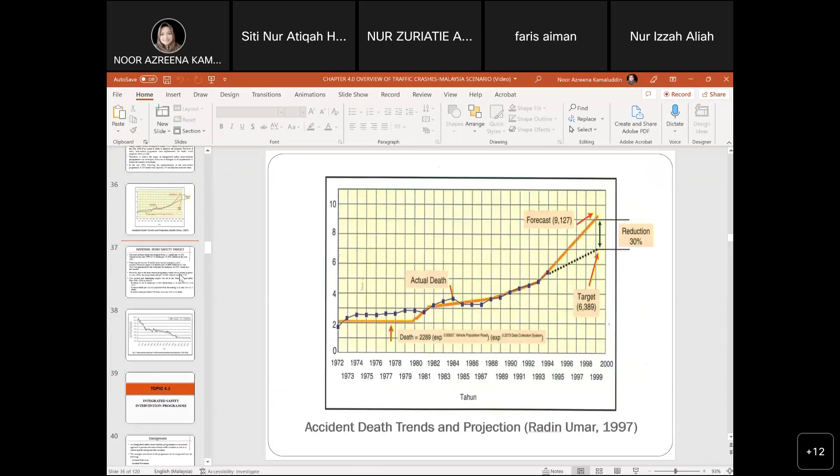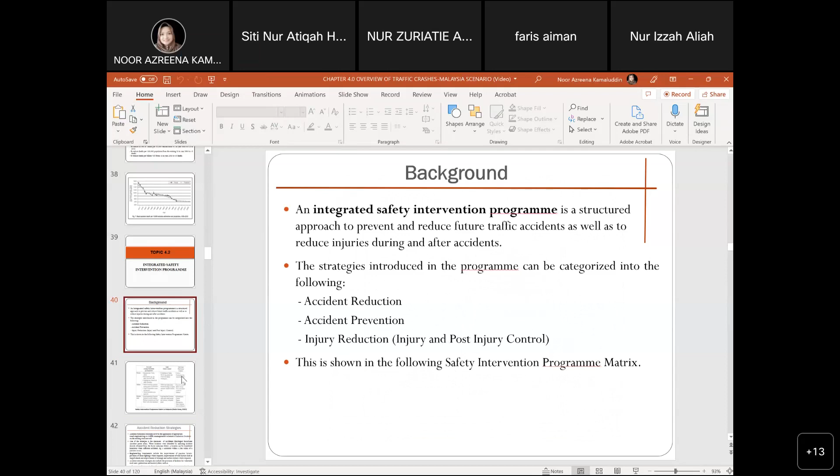Why accident happen? Because one of the drivers fail to cope the surrounding, the driving environment. So for the integrated safety intervention program, there are three elements. The first one, they try to reduce the accident, but if the accident still happen, then they also come up with the prevention. Tapi kalau berlaku juga, kemalangan tetap berlaku, then they try to reduce the injury severity by improving the injury and post-injury control. So kalau tengok kat sini, accident reduction and prevention is in the pre-crash category.

For example, we can give awareness via education, enforcement, campaign, vehicle inspection, etc. Road engineering program as well. Then once the accident occurred, then how we control? Injury control and also post-injury control, post-crash.

Maksudnya semasa kemalangan berlaku dan kita ada injury control, contoh kita pakai helmet so that it can reduce the injury severity of the head of the rider.

Then post-injury control, macam orang yang ada dekat situ ataupun first aid, yang rescuer kan, ambulance. And nowadays ambulance is fully equipped with all the advanced technology. So dalam ambulance pun dia dah boleh at least help the victims kan, before arrive at the emergency department of the hospital. Okay, so dah banyak lah improvement dari segi post injury control.

Okay, during injury ni, ini termasuk lah airbag lah, apa lagi, brake kan, dan semula crash absorption, crash cushion, semua tu during the injury control. Try to reduce the injury severity.

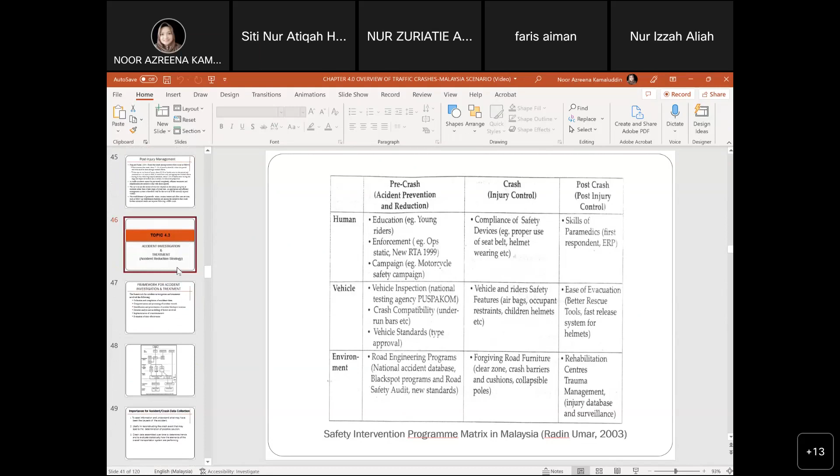Hari ni probably till the end of the class we will try to finish chapter 4. Topic 4.3 is about accident investigation and treatment. So once the accident occurred, how we do a forensic, how we investigate, what are the factors that cause the accidents, and how to treat or mitigate, how to fix the problem.

Let's say the accident occurred due to, contohnya, katalah unsignalized intersection. Selalu berlaku kemalangan 90 degrees perpendicular, selalu berlaku. So maksudnya ada kemungkinan dua-dua drivers tak considerate between each other, so berlaku kemalangan. Maybe how to fix, probably we can put warning sign, that is the cheapest, ataupun convert the unsignalized intersection to signalized intersection, ataupun kalau ada elemen-elemen yang lain, then we have to do the investigation.

Okay, let us look into the framework for accident investigation and treatment.

Madam, sorry to interrupt. May I ask? Yeah, sure. Are you recording the lecture today? Yeah, I'm recording. Okay, luckily you asked. Saya pun terlupa, sebab saya tekan tadi. Okay, we record. Okay, sorry, kita continue, kejap.

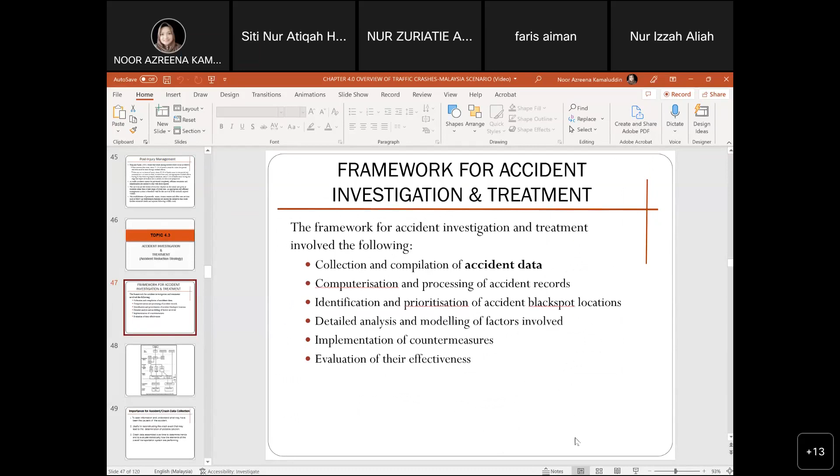Saya tak boleh baca yang atas ni. Apa tajuk dia? Okay, framework for accident investigation and treatment.

So it involves several processes, because we want to do an investigation, so there are steps involved. First and foremost, we have to get the data. Okay, the first step: collect and compile the accident data. Where to get the data?

The one and only agency that collects all the first-hand data is actually Royal Malaysia Police, PDRM. So accident data, whenever any accident occurs, they will report to the PDRM. Then PDRM will distribute the data to JKR, the local authorities, for improvement of the road, for example.

Because PDRM, the police, they only focus on enforcement. Meaning, if they get information that a road has many accidents due to violation of road rules, they will go to the site and probably do a roadblock. So police only focus on enforcement, but to improve road conditions, to identify the cause, to fix the problem, all that is the work of the local authority, JKR and also MIROS, they will propose solutions.

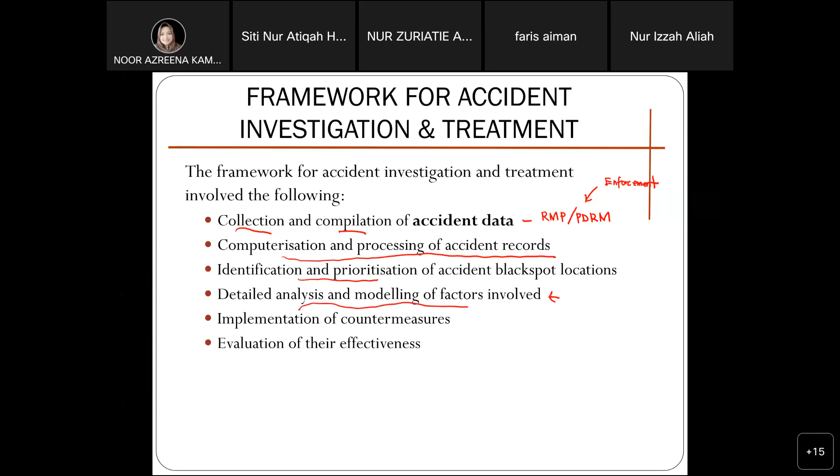So they will ask the local authority or JKR to go to the site and do inspection, and probably they will come up with a solution. Then detailed analysis and modelling of the factors involved. This part PDRM doesn't do; this is the work of the local authority or any safety actor. Then implementation of the countermeasure, and lastly, evaluation of their effectiveness.

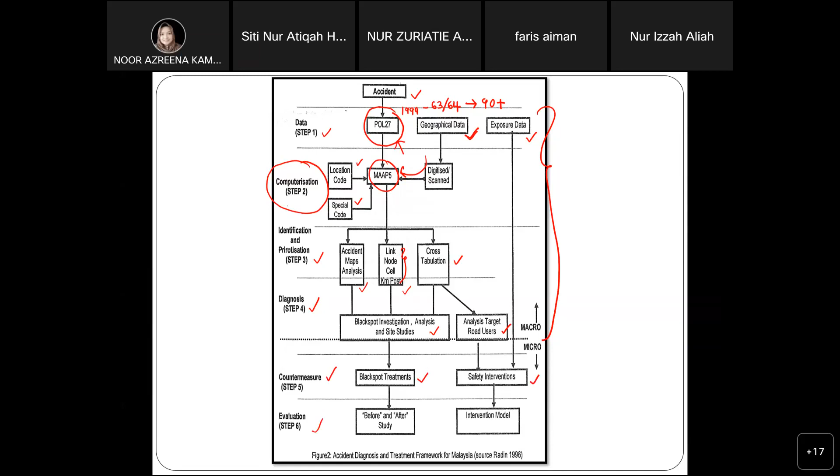And lastly is evaluation. How about the number of accidents after the implementation of the countermeasure? Before and after study, and maybe they will produce the intervention model as well.

Basically this is the procedure when an accident occurs. All accidents occurring should be reported to the police within 24 hours.

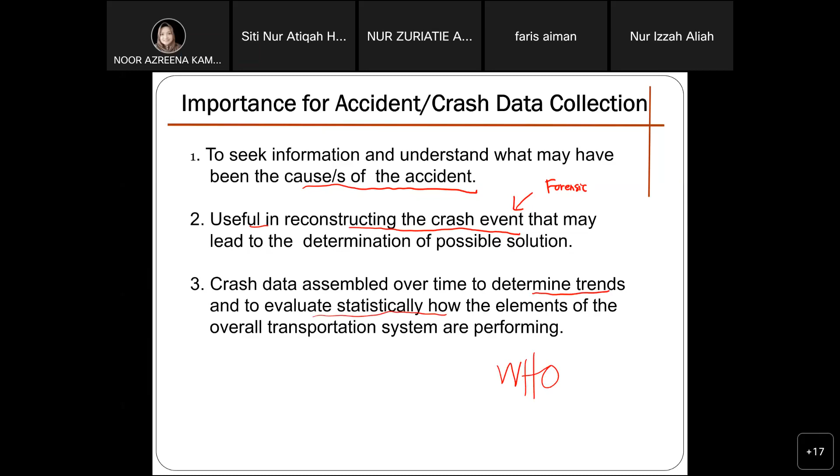Then to determine the trend, dan juga evaluate statistical bagaimana elemen keseluruhan transportation performing. So that is why the crash or accident data is very important. Even WHO pun mengumpulkan data kemalangan di setiap negara, World Health Organization.

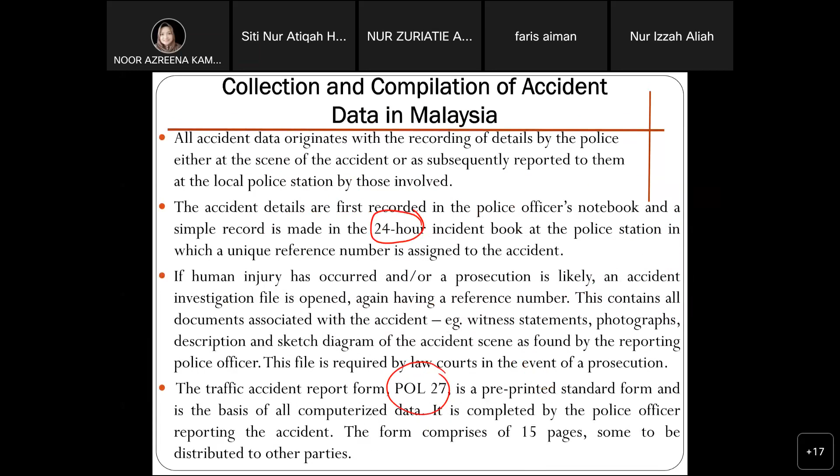This is how the flow of the report or flow of information once the accident occur. Dia lebih fokus sikit. Contoh kalau kemalangan berlaku, apa berlaku, polis akan datang. Siapa polis ni? Dia ada investigation officer, IO. Kita panggil IO, investigation officer. So this investigation officer will make a police report for you.

Dia yang akan menulis, dia yang akan type, tapi awak memberi maklumat. Witness will give information. Tapi as my experience, witness punya laporan tak direkodkan, witness sekadar membantu je lah. Tapi the main report is victims, yang melanggar dan dilanggar.

Katalah kemalangan berlaku dekat depan Jakel Shah Alam. IO akan datang, IO will investigate the crash. Lepas tu IO akan report dekat balai dia, katalah balai section 7, dia report kat balai section 7, dia akan isi borang POL 27, and the report must be made within 24 hours.

Once that officer, IO dah isi report, then the report will go to the police district office. Dia dekat section 7, nanti dia pergi ke Shah Alam, kalau Shah Alam ni semua dah under Shah Alam. From Shah Alam, dia akan check dulu POL 27 form semua. Then dia akan directly masuk ke Bukit Aman HQ. Di Bukit Aman sekarang, dulu dia pakai sistem call CARS.

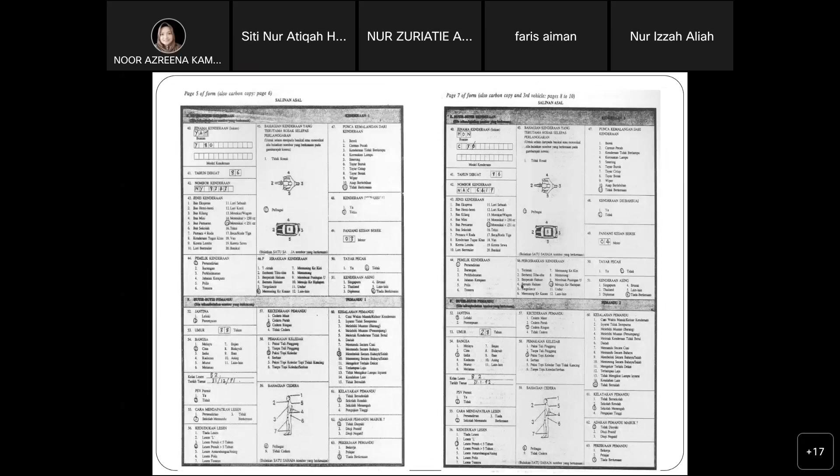Okay, kejap. Okay, tak apalah. Saya nak cari pun waktu ni susah juga.

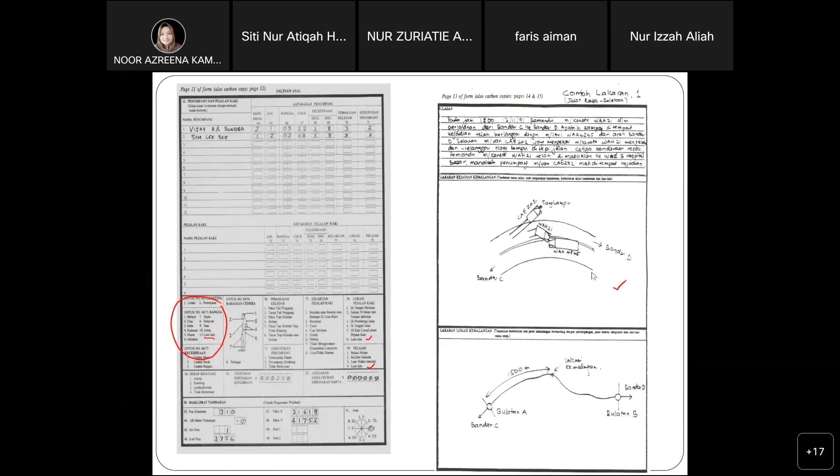Okay, this is just example collected data.

Location, severity, path trajectory - this is all data that is collected.

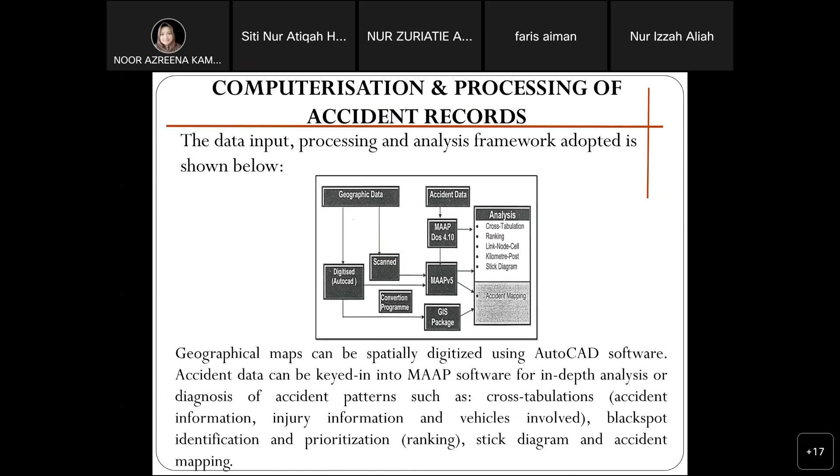This is the third step on the identification and prioritization of accident black spot location.

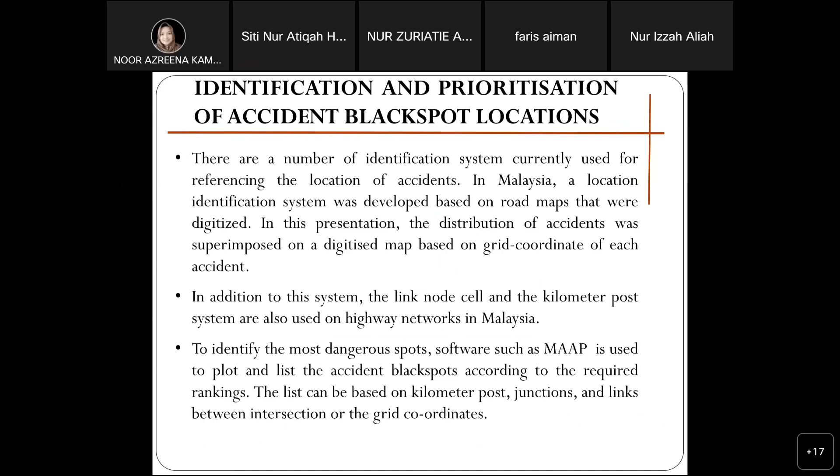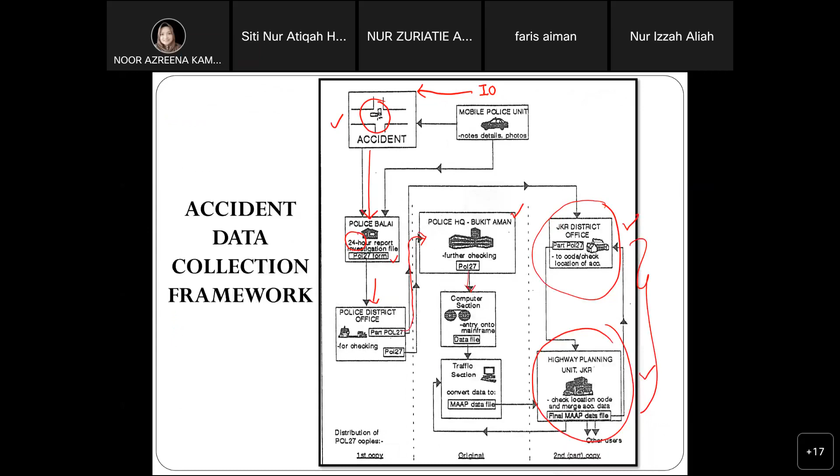This one, step 3, identification and prioritization.

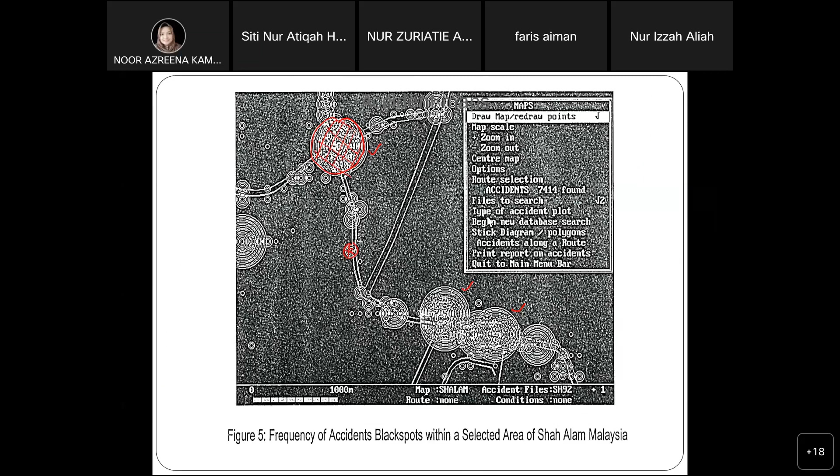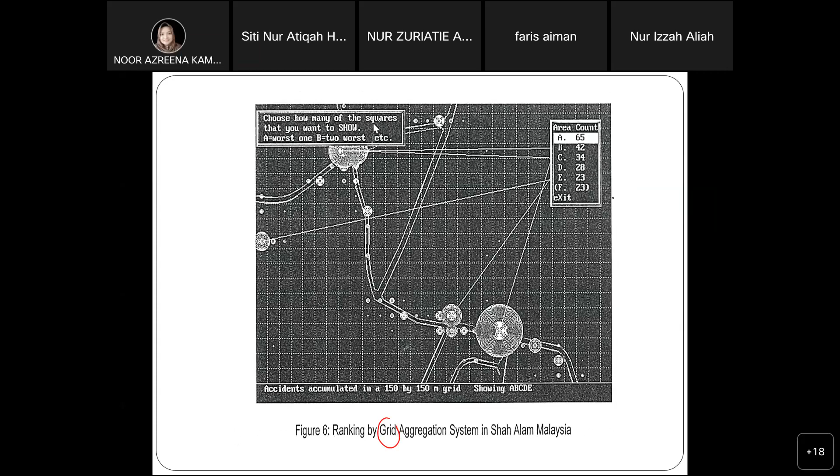This is one of the examples for using coordinates, X and Y coordinate.

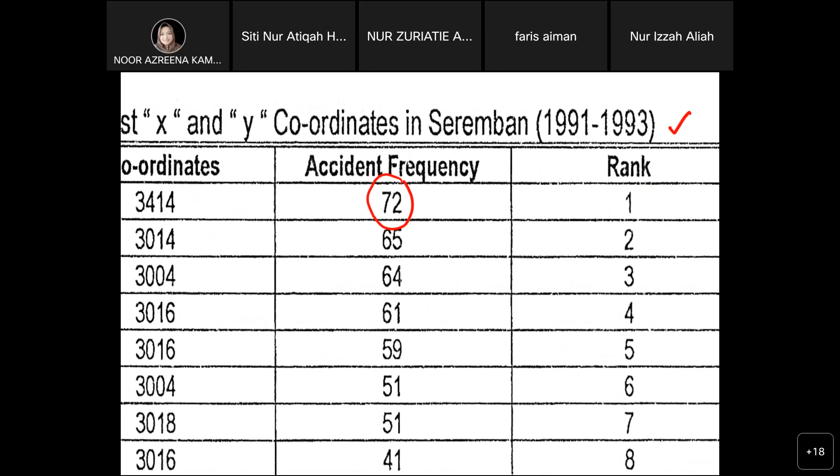This one, if they use the link node cell.

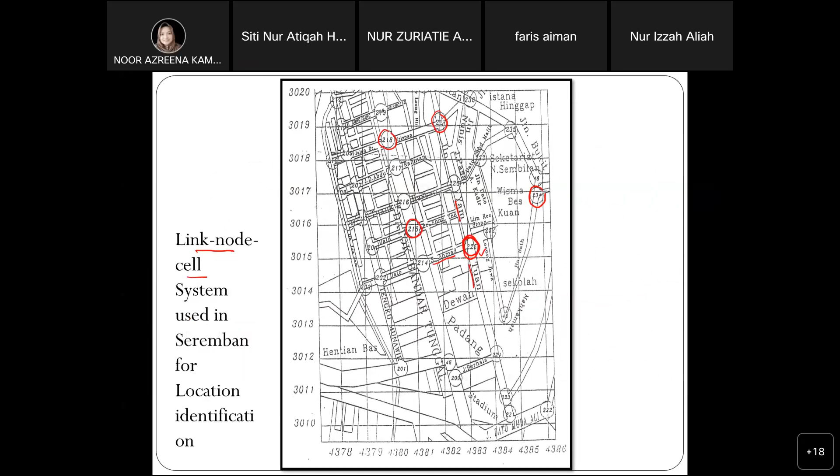Okay, tak nampak, tak ada. Kita tengok 215. Sebab map ni contoh je. Ini jalan Fong Yi ke apa ni? Datuk Fong Yi dengan ni jalan apa, kalau kat sini dia kata Lee Fong Yee dengan Datuk Bandar Tunggal. Jalan Datuk Bandar Tunggal dengan Lee Fong Yee, they rank number 4 with 55 accident number. So this is how they rank the location based on the accident number to prioritize which one needs to improve segera.

Okay, ini contoh yang menggunakan link. This is example using cell. Sama je, maksudnya dia akan rank juga. Kalau pakai cell pun dia akan rank, kalau pakai link pun dia akan rank. Okay, dan yang ni kalau pakai ranking point.

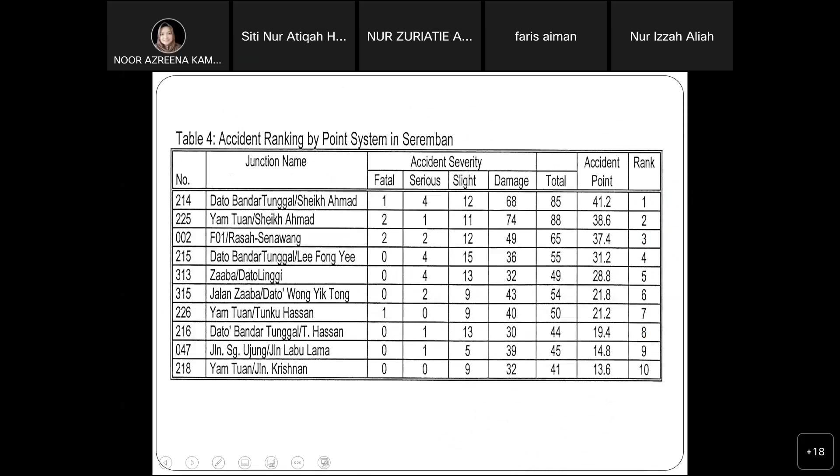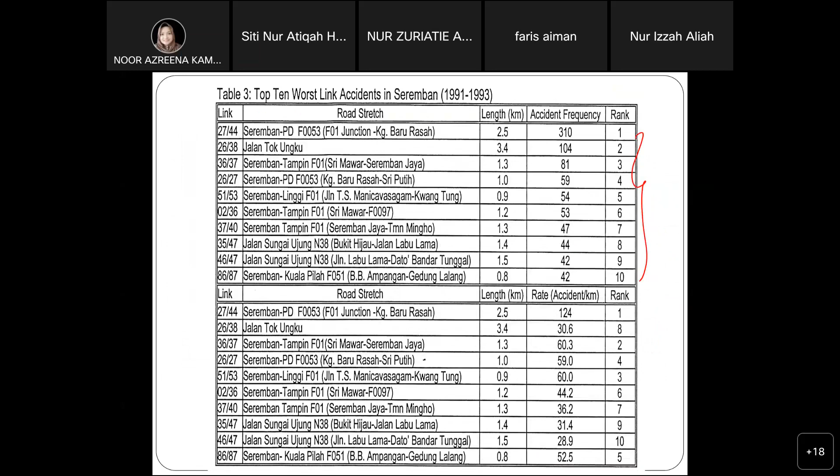Macam mana ada ranking pula ni kan? Macam mana ada cell lah, ada link lah. Yang ni semua ni adalah di sini. Ranking of black spot could either be carried out using map, node, link, cell, accident point, accident costs, kilometer post analysis. So this is how we analyze and prioritize the black spot area.

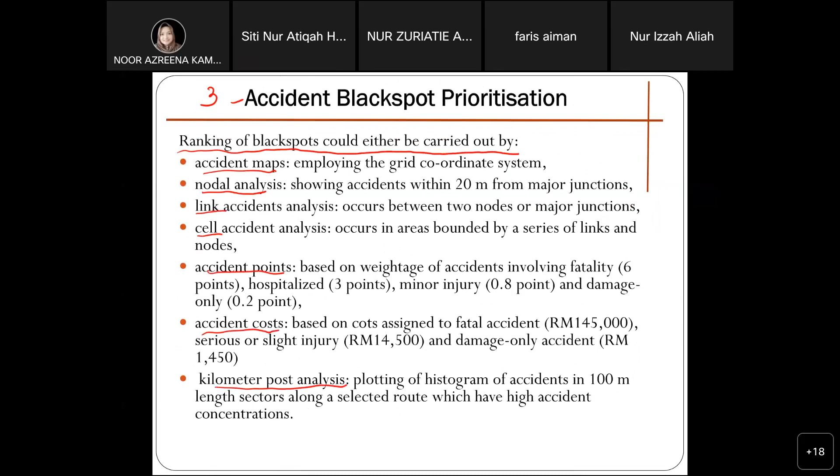Okay, ini accident map, this is grid, this is coordinate, this is node, this is node, link, cell. Yang ni ranking, accident ranking. So how to do the accident ranking?

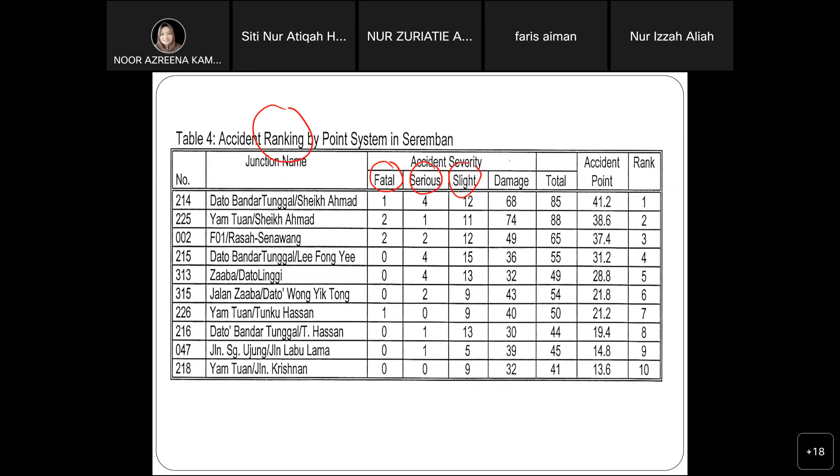They give point for each types of severity. Contoh, kalau fatal, dia akan bagi point. Serious, dia akan bagi point. Slight and damage, total contoh ni 85. Accident point, setiap jenis kecederaan ada point yang berbeza. Point dia mana, kejap.

Kalau fatal, dia akan bagi 6 point. Kalau hospitalized, 3 point, yang ni selalu severe injury lah. Minor injury, 0.8 point, dan damage only 0.2 point.

So kalau nak buat calculation, nanti contoh jalan yang tuan ni, 225 ni, 2 darab 6, 1 darab berapa entah, siapa tak ingat tadi. So ni semua kena darab. Dia come out dengan accident point dan dia akan rankkan. So that is how we use to prioritize the location.

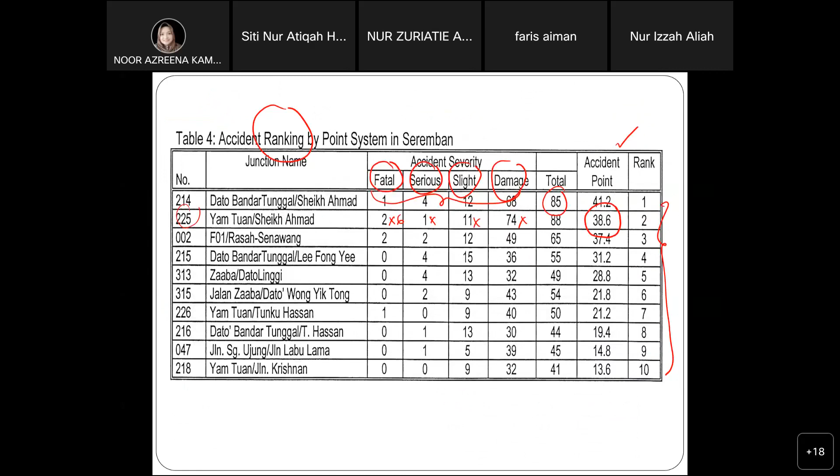Okay, yang ni based on cost. Ni cost pula, tadi ni pakai point untuk accident severity, pakai cost. Konsep yang sama, but the difference is setiap kecederaan ni kita darabkan dengan jumlah cost dia. Saya tengok patah balik belakang, dia ada tak tulis setiap cost kemalangan.

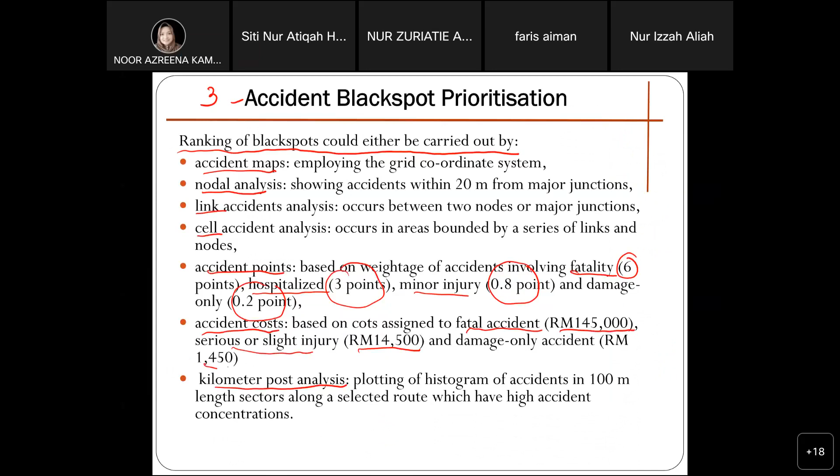Okay, dia kata kalau fatal kena multiply by 145,000. Serious or slight injury multiply by 14,500. Kalau accident damage only 1,450. So that is how they categorize, dia darabkan dengan that value. So they come out dengan cost, then they can rank. So that is how we prioritize ya.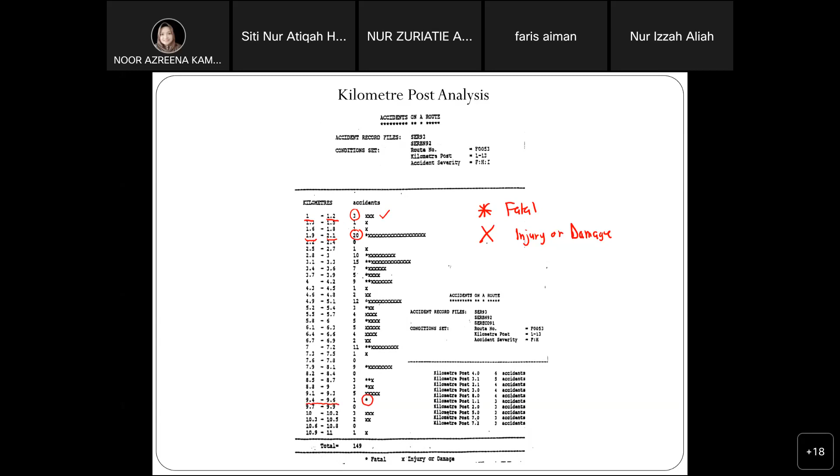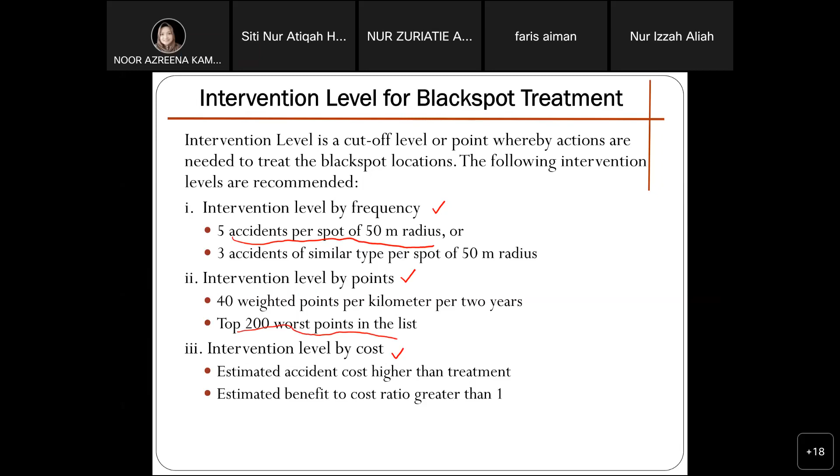Okay, intervention for black spot treatment. Dia ada depends, either intervention by frequency, nak tahu berapa jumlah kemalangan. Intervention by point, kita kira point dia. Intervention by cost, okay. Yang ni boleh baca lah. Contoh intervention by frequency, 5 accident per spot of 50 meter radius. Intervention by point, top 200 worst point in the list. So yang point paling tinggi kita akan prioritize.

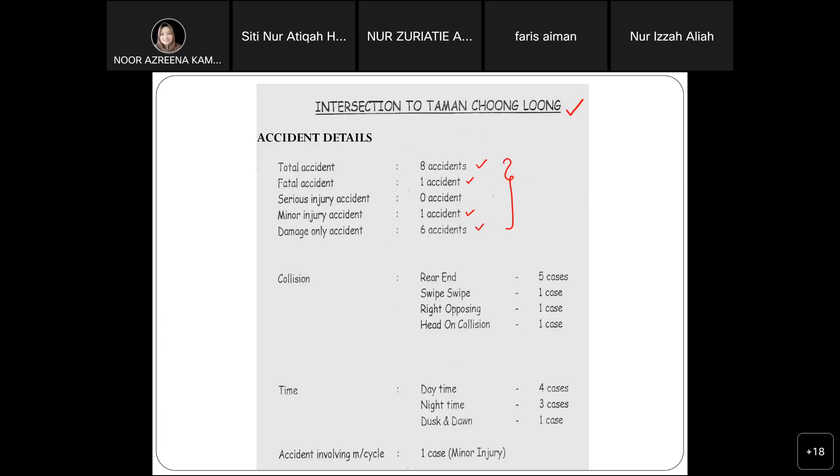Okay, yang ni kita tengok detail diagnosis and implementation of countermeasure pula. Ini satu contoh at Taman Choong Loong. It has been reported, ini report lama, it has been reported at intersection to Taman Choong Loong ni, dia ada banyak kemalangan. Kemalangan apa? 8 total accident, which one of it is fatal, one is minor, and 6 damage only. Okay, ada 8 kan? 8. So out of these 8, 5 adalah due to the rear end, langgar belakang.

So kalau langgar belakang ni normally kalau saya tanya awak, kalau langgar belakang ni selalu berlaku dekat mana? Langgar belakang selalunya berlaku kat mana? Anyone? Traffic light. Okay, selalunya kalau langgar belakang ni berlaku dekat traffic light. Ini early investigation, sebab apa? Sebab orang depan dah berhenti, lampu kuning, orang depan berhenti, orang belakang tengah nak memecut.

So normally berlaku kat traffic light. Tapi kita tak tahu lagi intersection ni macam mana. Swipe ada satu, right opposing satu, head on collision satu. Okay, out of the 8 ni, 4 waktu siang, 3 waktu malam, 1 waktu senja lah. Okay, accident involving motorcycle, motorcycle ada 1 je. So out of the 8 ni, only 1 je melibatkan motosikal. The rest probably passenger car. Okay, ini early info.

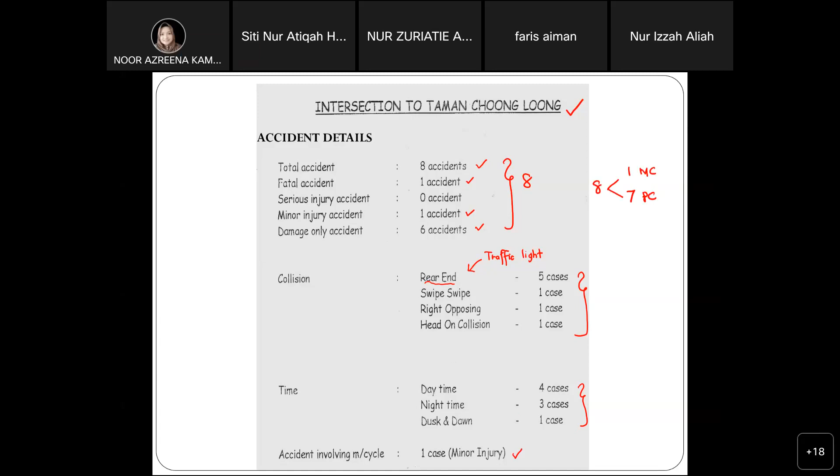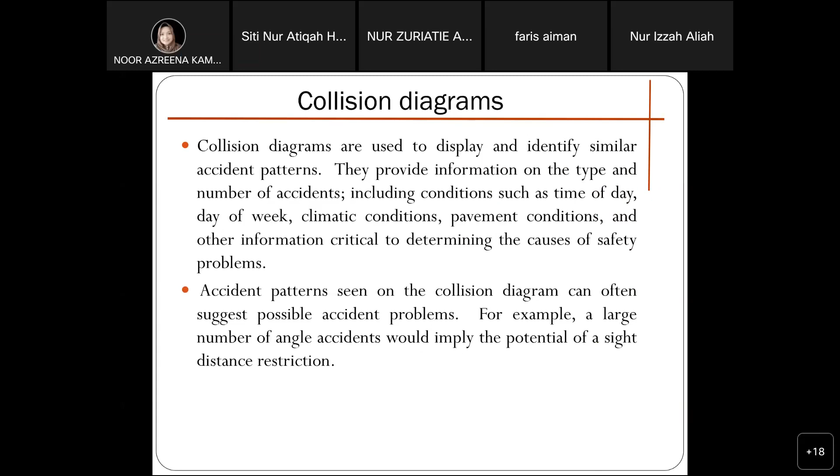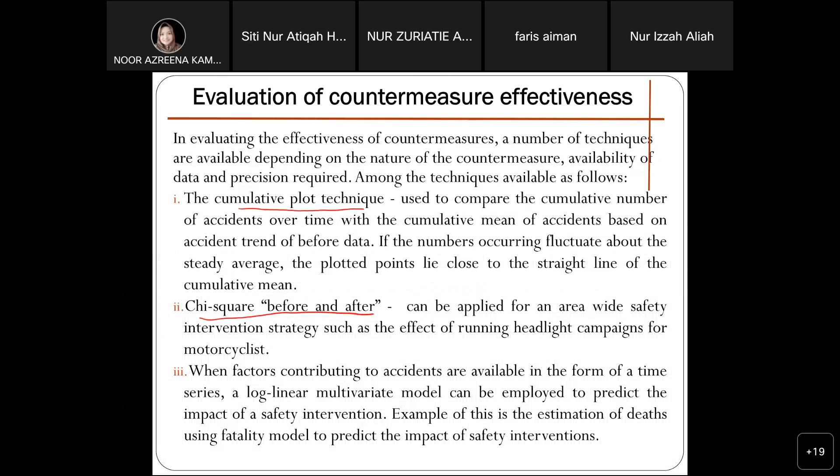Sampai situ. Ada nak tanya? Ada nak tanya tak? So far okay? Okay, madam. So far okay, madam.

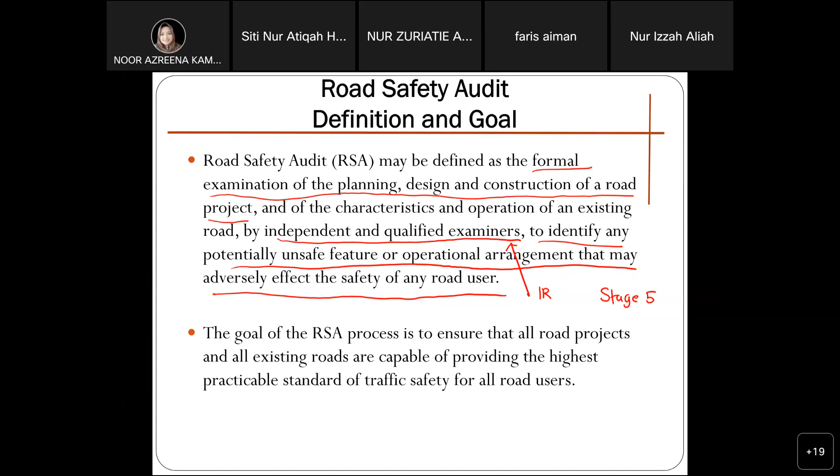So we try to identify any unsafe features on the road. Then we want to come up with the solution, sebab kita tak nak contoh ada hazard yang kita tak fix menyebabkan kemalangan.

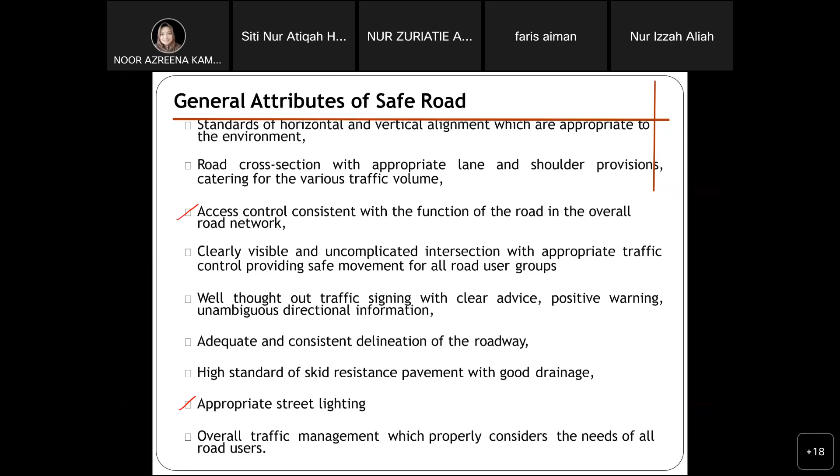Okay, this is example of the safe road attributes. Contoh, ada appropriate street lighting. Apa lagi? Access control consistent with the function of the road in the overall road network. Access control, katalah expressway, takkanlah banyak sangat access control, kan? Buat expressway tapi banyak entrance dia. So dia kena appropriate dengan consistent with the function. Okay, apa lagi? As listed lah banyak ni, general attribute of road safe.

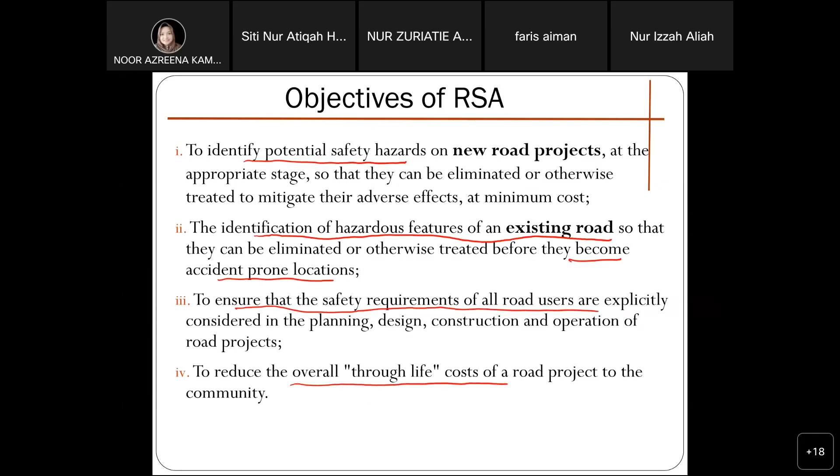So the objective of the road safety audit, there are 4. First, to identify potential safety hazard. Second, the identification of hazardous features of an existing road, because we want to remove it, we want to treat it before it becomes accident prone location. Ensure safety requirement of all road users are explicitly considered in the planning, design, construction and operation. And lastly, reduce overall through life cost of the road project to the community, sebab rakyat yang akan pakai, community yang akan pakai jalan tu.

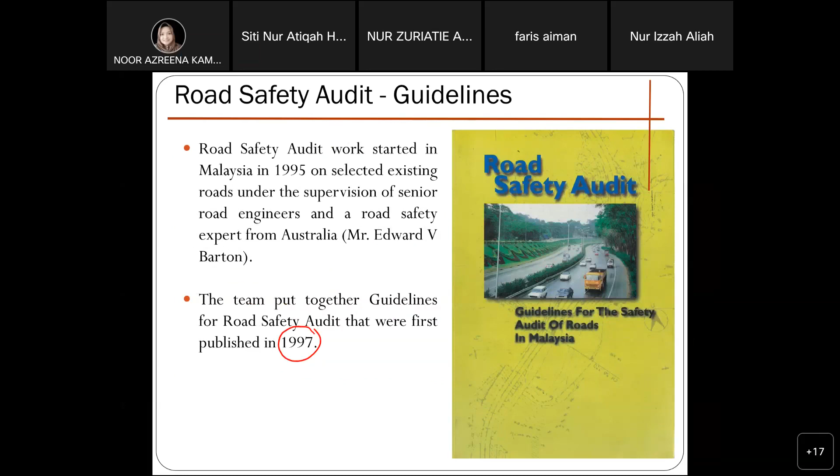Okay, I am currently active with this audit, road safety audit. Saya tengah buat road safety audit dekat UiTM Puncak Alam. Kenapa buat kat situ? Sebab saya tak ada professional engineer lagi, tapi sebab untuk kegunaan dalaman, maksudnya untuk kegunaan UiTM, so masih okay lagi kalau kita tak ada professional engineer untuk do the investigation.

Okay, so saya dan my team dari Mitrans, kita pergi ke UiTM Puncak Alam and do the investigation on the road safety kat sana. Sebab apa? Sebab ada beberapa kemalangan dan antaranya adalah kemalangan maut. Kemalangan maut ada berapa kes saya tak ingat. At least satu daripadanya adalah melibatkan e-hailing rider, penghantar makanan.

Okay, so kita tengok dia punya layout, jalan, siapa yang biasa ke UiTM Puncak Alam, jalan dia agak narrow dan a bit challenging for us sebenarnya bila kita dapat report kemalangan berlaku pada waktu senja. Bila kemalangan berlaku pada waktu senja ni, dia ada melibatkan mystic things lah. So yang tu a bit challenging for us nak describe, sebab bila benda-benda mistik ni bukan fakta yang boleh dibawa ke mahkamah, macam tu contoh.

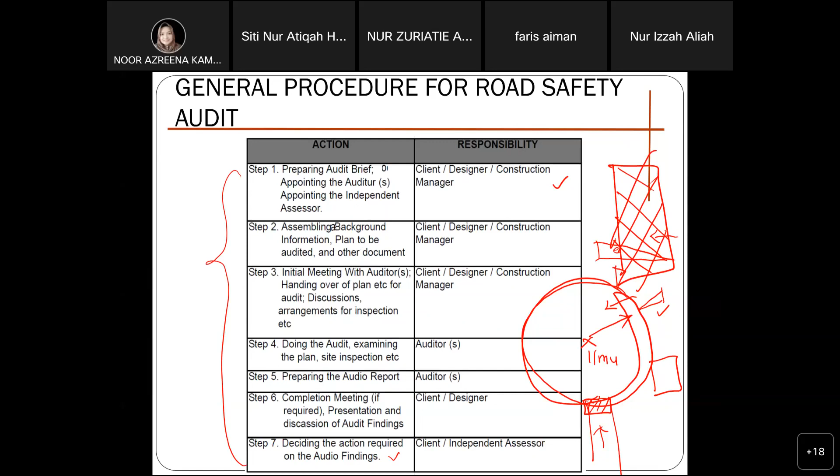Sekarang saya dekat stage untuk siapkan report lah untuk that road safety audit. Okay, so the process dia semua ni until decide the action required on the audit finding. Okay, ni semua boleh baca lah ni, apa kena buat. Okay kalau kita teruskan, ini yang saya cakap pasal stage of the road safety audit, it has 5 stages, which the first stage is on the feasibility and planning stage. Recall chapter 1, saya ada cerita pasal feasibility study. So waktu ni kita tak buat lagi, kita masih on the drawing, tengok drawing, masih lagi peringkat awal. Kat situ dah kita buat road safety audit.

Second stage is during the draft preliminary design stage. Third stage, during detail design stage, so normally at this stage is very critical. Sepatutnya waktu ni lah engineer dah nampak dah possible problems, potential problems if the design proceed. Kan, waktu ni lah nak kena fixkan. Lepas tu sebab dia dah nak construct, waktu construction pun ada road safety audit, nak ensure safety of the road user. Dan last one, post opening stage on the existing road. Ini yang awak buat waktu lab.

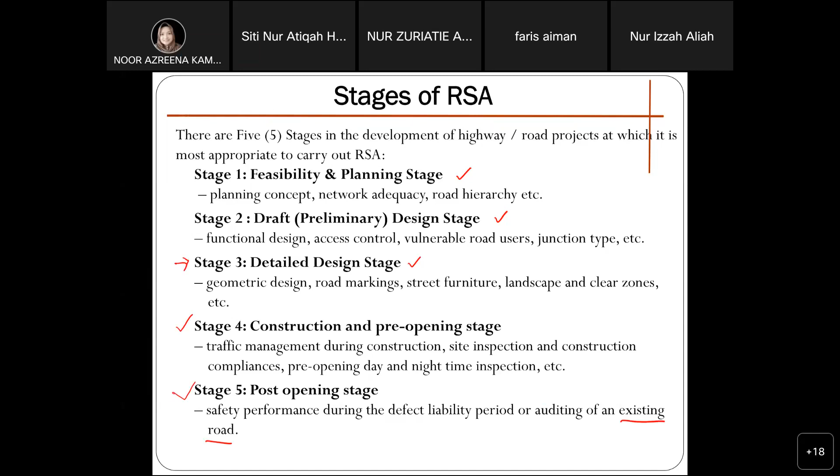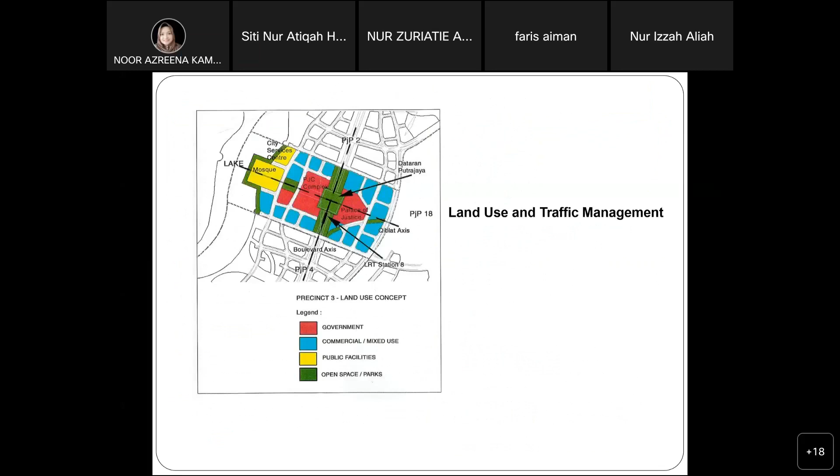Stage 1 boleh baca boleh baca. Ini adalah checklist for the stage 1. Contoh drawing for the stage 1. Nak tengok selamat ke tidak kawasan yang kita buat ni, sesuai ke tidak nak buat jalan. Okay ni contoh je lah gambar.

Ni stage 2, saya tak pergi detail, kalau nak baca boleh baca on the drawing. So try to fix, cuba tengok ada apa-apa masalah ke on the drawing. Ni contohnya.

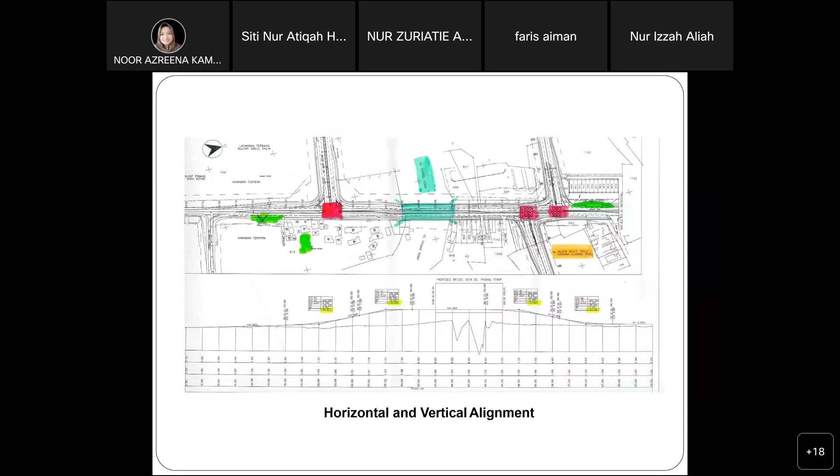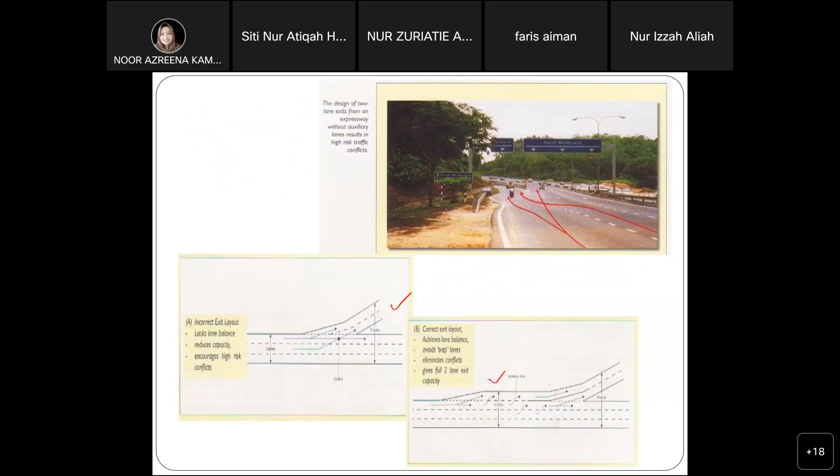Okay, sekarang kita nak fix the drawing. Contoh yang ni incorrect exit layout. Kita tambah channelization, kita tambah taper length kat sini untuk assist the driver to make a left turn.

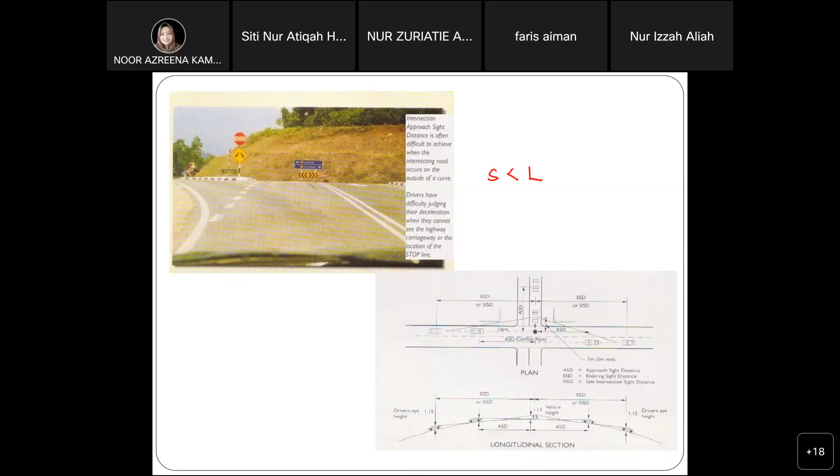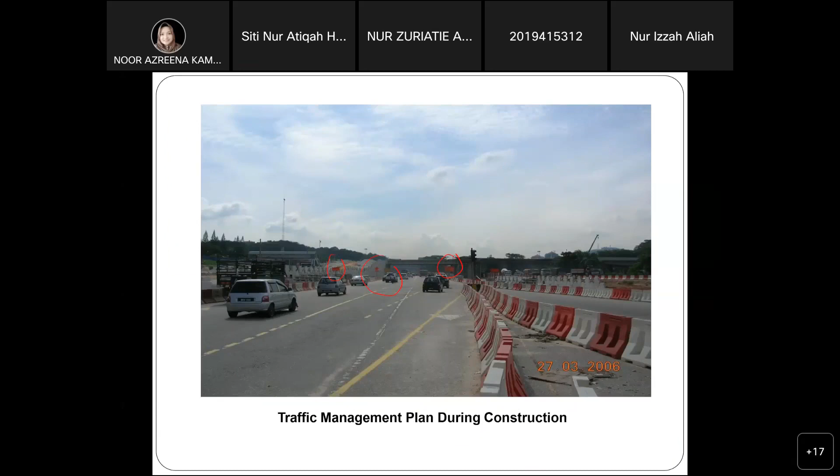RAM yang sangat tinggi. Stage 4 during the opening stage. Selalu kalau tengok waktu construction, ada banyak water barrier ni. Sebenarnya lepas tu ada banyak signboard. Ini semua kena buat road safety audit, cukup tak signboard distance dia semua tu, kena buat road safety audit.

Buat inspection, tengok apa guardrail. Sebab guardrail ni pun antara benda yang bahaya. Guardrail, yes, it helps to guide the driver. Tapi kalau kemalangan, bila dia hit the guardrail, dia punya material tu tajam.

Sebab tu sekarang dekat area Sepang, Sepang ke Subang, dia dah tukar kepada roller barrier. Roller barrier maksudnya dia letak tayar, so that it can absorb the force of the vehicle, impact of the vehicles or accident, then dia akan back to the road semula.

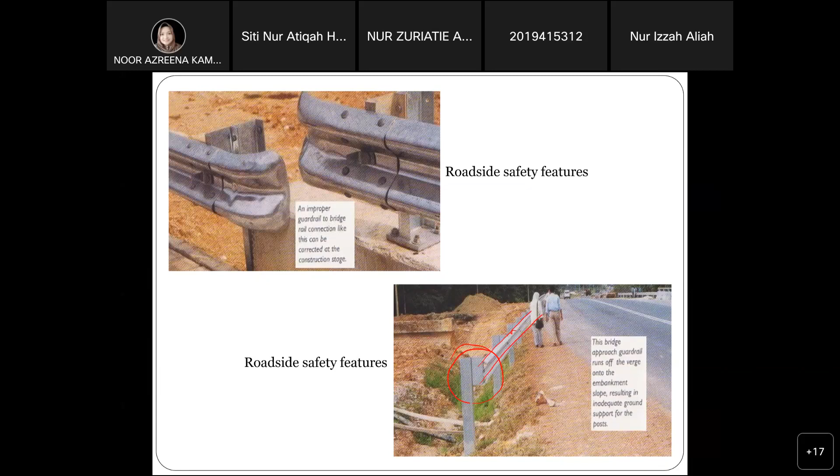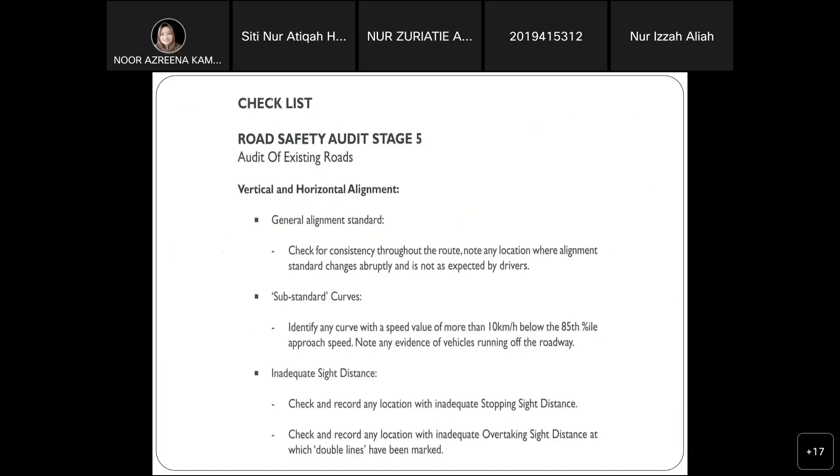And the last one is on the existing road. Ini adalah checklist yang awak tengok, awak refer masa buat road safety audit dalam lab work. Kita tengok semua elemen street lighting, pavement marking, etc. Ni contoh-contoh gambar je, tak ada apa.

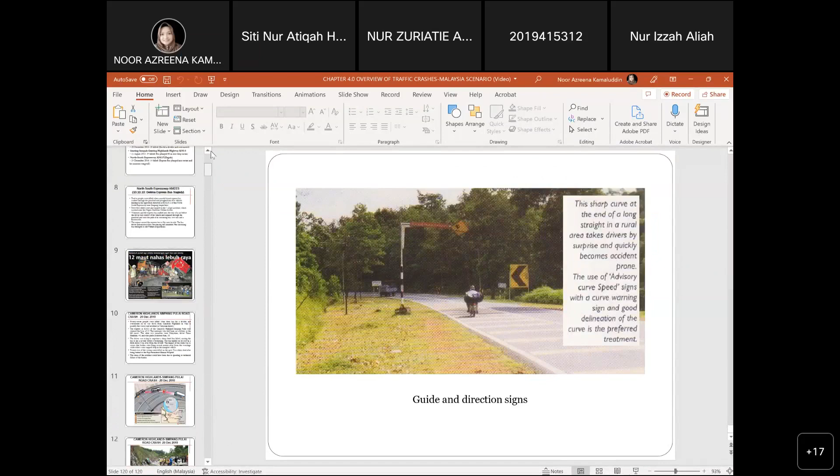Habis dah, you have question on the chapter 4? Do you have question? Semua okay ke? Laju sangat ke? Dia banyak teks, bila teks tu saya rasa no point saya baca sebab saya dah ceritakan in summary. So if you want to know detail, boleh buka. Ada nak tanya apa-apa tak, sebelum kita end our lecture? Tak ada, tak ada, tak ada.